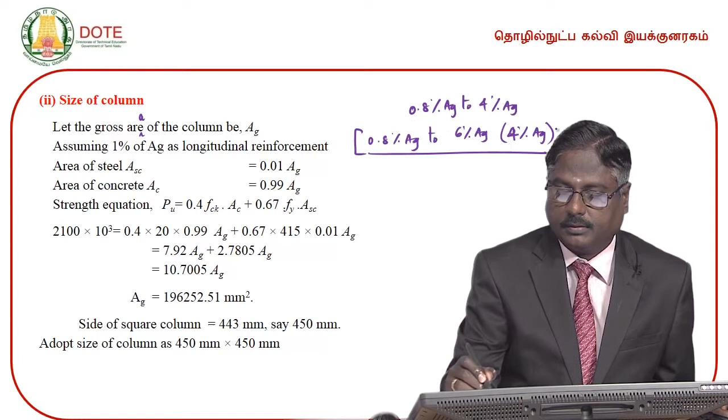Let the gross area of the column be AG, assuming 1% of AG as longitudinal reinforcement. The minimum is 0.8% of AG, the maximum is 6% of AG, and for all practical purposes it is restricted to 4% of AG. So we can assume any value between 0.8% AG to 4% AG, but in general it is assumed as 1% AG to 2% AG. This we have to bear in mind.

Again, 1% of AG is nothing but 1 divided by 100 of AG, so this is equal to 0.01 AG, very simple to remember.

So area of steel, assumed as 1% of Ag, therefore ASC is equal to 0.01 Ag. And area of concrete is equal to gross area of the column minus area of steel in compression, or the longitudinal bars, that is Ag minus ASC. ASC is assumed as 0.01 Ag, so 1 minus 0.01 will give you 0.99 Ag. So this is the value of AC.

Substituting all these values in this expression, 0.4 FCK AC plus 0.67 FY ASC, and PU of course arrived at, since this 1400 is a characteristic load, multiplied by the partial safety factor for load, the design load is found to be 2100 kilonewton, which we can rewrite as 2100 into 10 power 3 Newton.

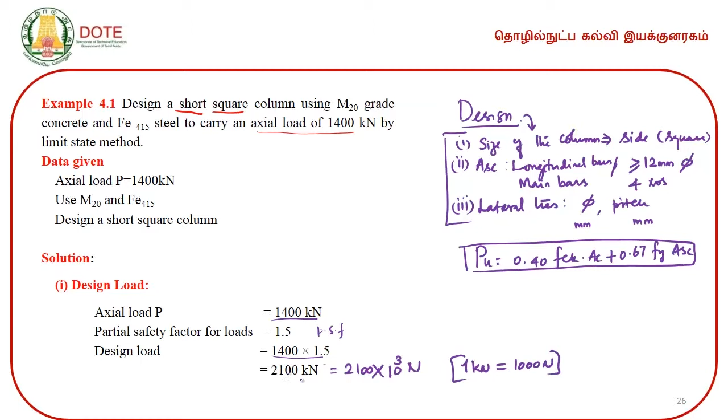Since 1 kilonewton equals 1000 Newton, converting kilonewton into Newton and substituting and solving, the gross area of the column is found to be 196,252.51 millimeter square, and this is the gross area of the column.

Now we must know the formula to find the area of each shape. For a square column, if the side is A, Ag equals A square. For a rectangular column, with breadth B and depth D, Ag equals B into D. For a circular column of diameter D, the area equals pi d square by 4. All three simple formulae one has to remember.

In this case it is a square column and the area is found to be this value, and for a square the formula is A square. To find the side you take the square root, so the square root of 196,252.51 is equal to 443 mm. This cannot be used as such because it has to be rounded off for practical application, so 443 millimeters is rounded to 450 millimeter.

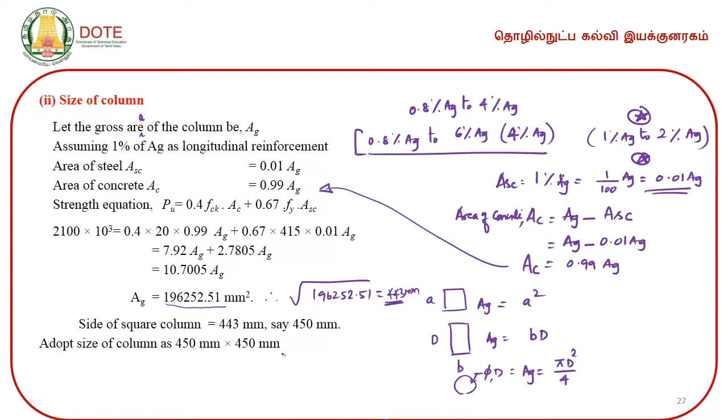Now the side of the column is arrived at. So the side of the column is 450 mm by 450 mm, and from the side of the column we have to find out the gross area of the column. We had initially assumed the area of steel as 1% of gross area.

So ASC is equal to 0.01 into Ag. Remember, after calculating the gross area and finding the side of the square column, you again find the gross area because you have rounded off. This is not 450 as per calculation, it was only 443 millimeters, which you rounded off to 450 mm, so now you have to calculate the actual gross area of the column using 450 by 450.

This is the percentage that you have assumed, so the area of steel in compression, or the area of longitudinal reinforcement, is found to be 2025 millimeter square. You can assume the diameter of the bar from 12 mm, which is the minimum diameter of the bar to be assumed, and we have to keep this in mind.

In this case, 20 mm diameter is assumed, and also 16 mm diameter bars are assumed. For economical reasons, we can have a combination of two diameters of bars. So here we have assumed 20 mm bars as well as 16 mm bars, providing 4 numbers of 20 mm bars and 4 numbers of 16 mm bars, and the actual area of steel is found to be 2060 millimeter square.

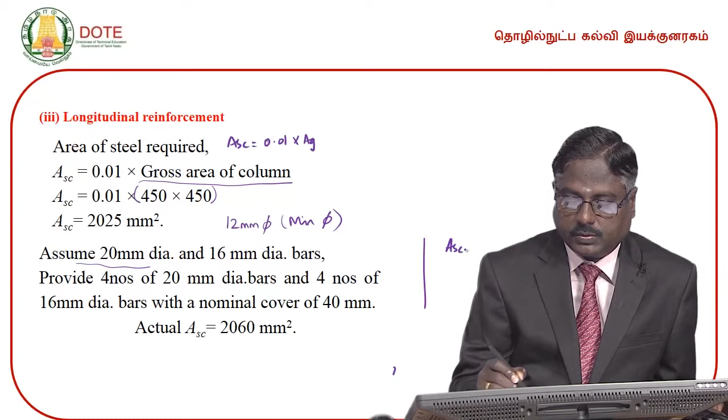That means we work out the actual ASC as 4 numbers of 20 mm bars, that is 20 square by 4, plus 4 numbers of 16 mm bars, that is 16 square by 4. This comes around 2060 millimeter square, but as per design it is 2025, which is less than that, so this is okay.

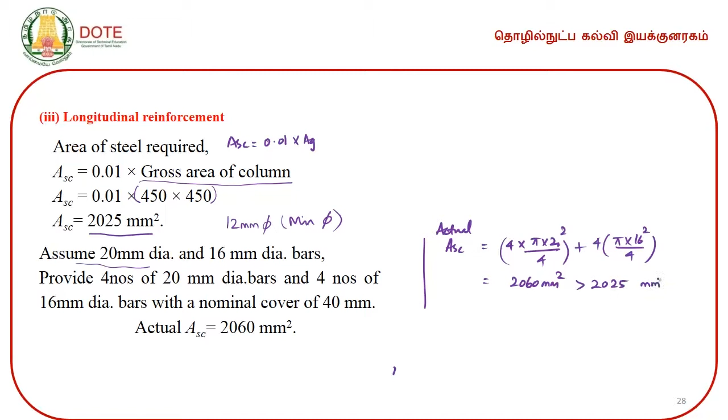And this is about the longitudinal bars. As far as lateral ties are concerned, we have to follow the provisions given in the code book. The minimum diameter of the lateral tie is the greater of two conditions: 1/4 of the largest longitudinal bar, here the largest longitudinal bar is 20 mm, so that comes as 5 millimeter, and the second condition is 6 millimeter. The greater of these two, 5 and 6, is 6 millimeter.

So we have to use the diameter of the lateral tie as 6 millimeter. The second one is the pitch of the lateral tie. For that we have three conditions: the least lateral dimension of the column, 16 times the smallest longitudinal bar, and 300 mm.

Here it is not 420 mm, it is mistakenly typed, it is 450. So the first condition is 450 mm, second condition is 256 mm, and third condition is 300 mm. We will take the least one, which is 256 mm. If you round that off, it becomes 250 mm.

So the result of the lateral tie is given in the form of diameter of the bar as well as the pitch we have to provide. Providing 6 mm diameter bar at 250 mm pitch is the answer for the lateral tie. So the answer for this problem is: the size of the column is found to be 450 millimeter by 450 millimeter, a square column, with longitudinal reinforcement of 4 numbers of 20 mm bars and 4 numbers of 16 mm bars. Lateral ties: 6 mm diameter bar at 250 mm pitch.

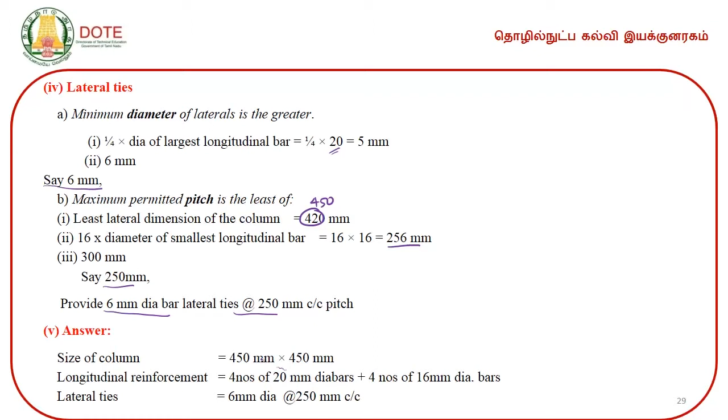Though our result ends at this point, for practical applications and to follow the codal provisions, we have to ensure this. So in this case, the answer is: size of the column is 450 by 450, main reinforcement is 4-20 plus 4-16 mm bars, lateral tie is 6 mm dia at 250 center to center or pitch, and again an additional tie tying the intermediate bars.

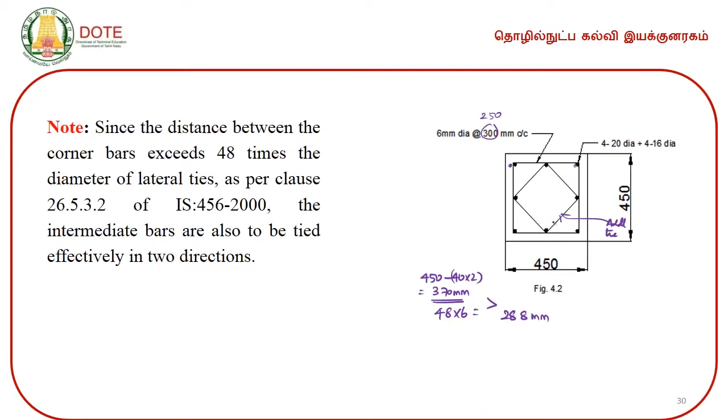And we will also see the second example. Again it is a design problem: design a short RC column, the only difference is here it is a rectangular column of size 300 mm by 450 mm, and the axial load given—again, it is not design load, so it is a characteristic load only. Axial load is 1000 kilonewton, grade of concrete given is M20, and steel is Fe415.

This you have to remember. Since the area of the column is directly given, one need not assume the area of steel in terms of gross area of the column. In the previous problem, area of steel was assumed as 1% of gross area, and the balance data worked out to find the size of column. But in this case, the size of column is given directly, so there is no need to assume. Remember this point.

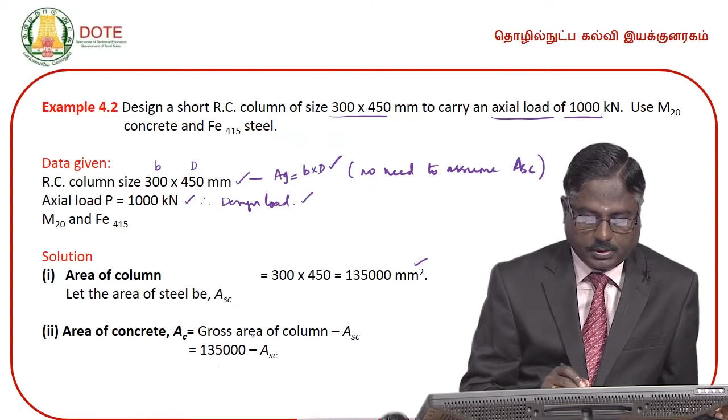So now area of concrete is equal to gross area of the column minus ASC. This is the area of concrete, and design axial load on the column is 1.5 times, this being the partial safety factor, giving the design load. Again the same old formula is to be used.

Design strength of the column is Pu equals 0.4 FCK Ac plus 0.67 Fy Asc. Substituting the relevant values, the area of steel in compression, or the area of longitudinal reinforcement, is found to be 1555.27 millimeter square. Now we have to find the number of bars.

Before that, you assume the diameter of the bar, which should always be greater than or equal to 12 mm.

So now assuming 16 mm bars, we can calculate the number of bars required using this expression: number of bars equals area of steel arrived divided by area of a single bar. In this case, it is 1555.27 divided by pi into 16 square by 4, since we have assumed 16 mm bars. This is the area of a single bar.

The number of bars probably is less than 8, around 7.5 something. If you round off, you get 8 numbers. This is how you work out the number of bars. So providing 8 numbers of bars of 16 mm dia, the actual area of steel provided is 1608 millimeter square, and this is as far as the main reinforcement is concerned.

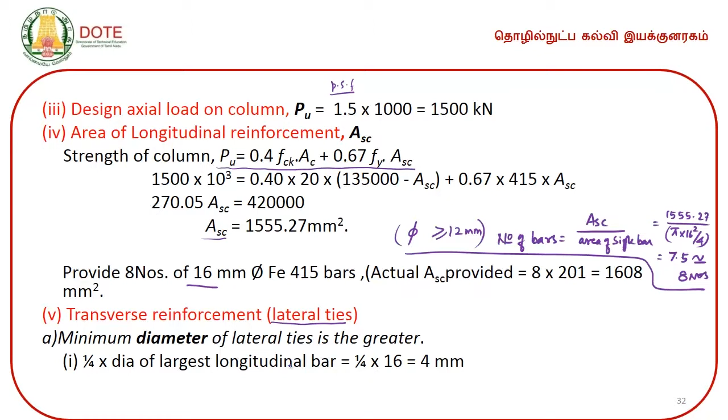The fifth step is to find the transverse reinforcement or the lateral ties, again following codal provisions. As far as the diameter of the lateral tie is concerned, there are two conditions: one is 1/4 of the dia of the largest longitudinal bar, that is 4 mm, and the second is 6 mm, the greater one being 6 mm. So provide 6 mm diameter as the lateral tie.

Maximum permitted pitch is the least of 3 conditions: one is the least lateral dimension, that is 300 mm; 16 times the smallest longitudinal bar, which comes around 256 mm; and the third condition is 300 mm. The lesser one is 256, approximated to 250 mm. So the answer is: provide 6 mm dia lateral ties at 250 mm center to center.

Now the answer part: size of the column is given in the problem, and the area of steel or longitudinal reinforcement is found to be 8 numbers of 16 mm dia bars, with lateral ties of 6 mm dia bars at 250 millimeter center to center, and this is the detailed drawing.

This is the breadth of the column, 300, and this is 450. 8 numbers of 16 mm dia bars are provided like this, and the lateral tie is 6 mm dia at 250 mm center to center.

Again, the intermediate bars are not connected here, but as per the codal provision this has to be connected. The intermediate bars are also to be connected by providing an additional tie. This one has to be remembered.

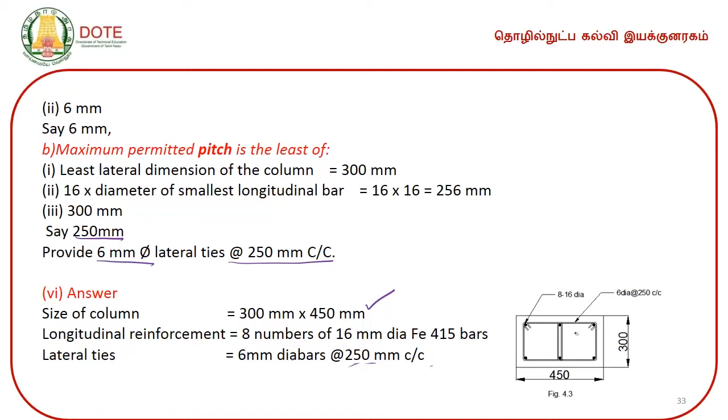The same procedure is to be followed: find out the distance between the corner bars. If that distance exceeds 48 times the diameter of the lateral tie, then we have to provide the lateral tie for the intermediate bars in both directions. Following that procedure, this additional tie is provided in the sketch.

We have seen in example 1 a square column, and in example 2 a rectangular column. In this example, we are going to design a circular column which has to carry an axial load of 1000 kilonewton with circular rings or lateral ties.

As you all know, a circular column will have two types of ties: the circular tie and the helical tie. In this exercise we are going to design a circular column subjected to axial load with a circular tie, with concrete grade M20 and steel Fe 415. The axial load is 1000 kilonewton, and the grade of concrete and steel are given.

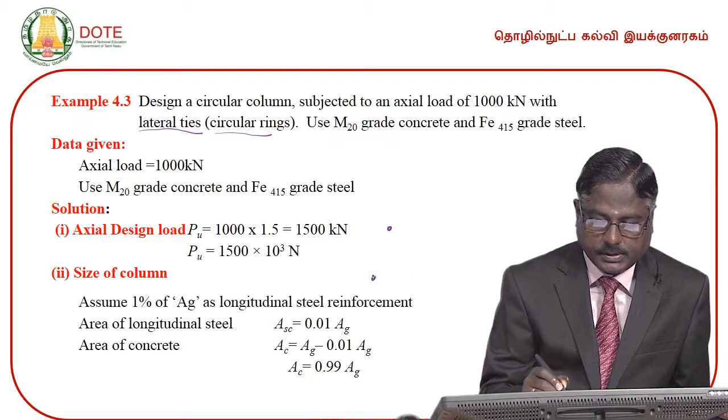Again, here the size of the column is not given. Therefore, since the size of the column is not given, assume the area of steel in compression. In general it ranges from 1% of Ag to 2% of Ag. So in this case it is assumed as 1% of Ag.

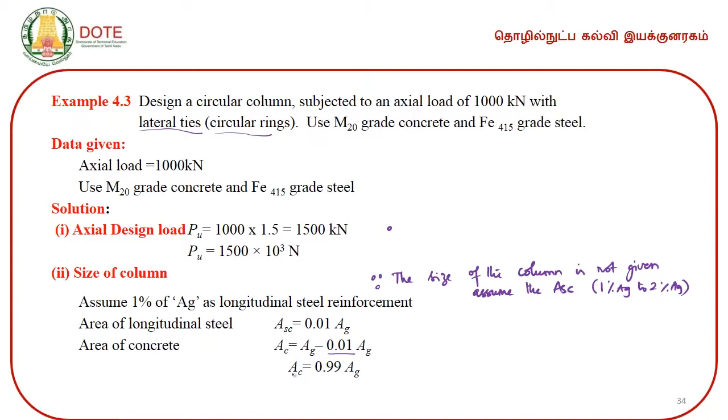So area of steel in compression is found to be 0.01 Ag, and area of concrete is found by deducting the area of steel from the gross area of the column. Substituting that in the formula, the gross area of the column is found to be 140180.36 millimeter square. Since this is a circular column, area for a circle is pi d square by 4.

Equating this to the gross area gives the diameter, and therefore d is equal to the square root of 140180.36 divided by pi into 4. So the diameter of the column required is 422.47 millimeter, which is to be rounded off to the nearest practicable value.

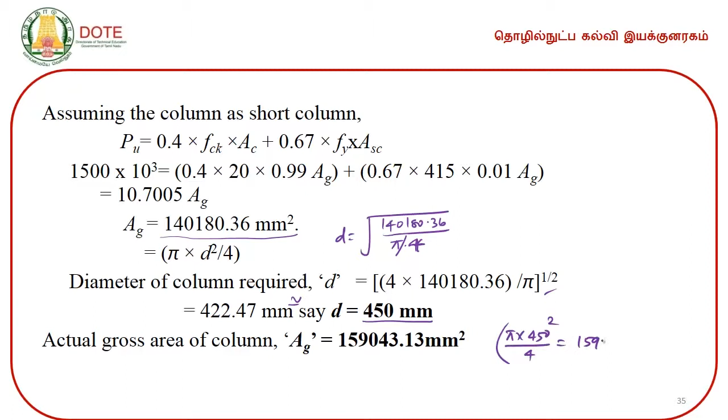So here it is rounded to 450 millimeter, and the actual gross area of the column, substituting pi into 450 square by 4, is equal to 159043.13 millimeter square. Now area of longitudinal reinforcement, it is 1% as initially assumed, substitute the value.

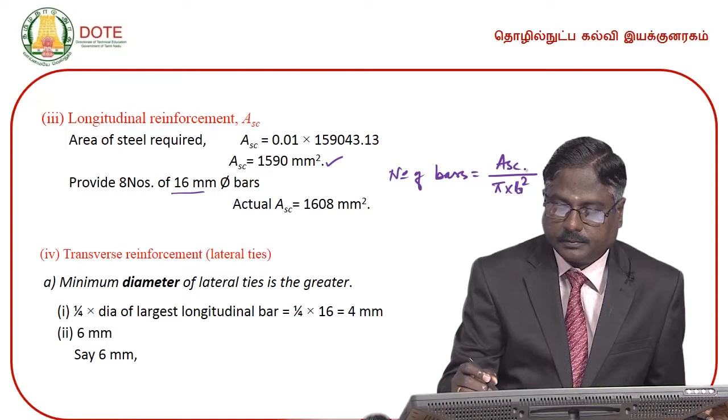Area of steel in compression, or area of longitudinal reinforcement, is found to be 1590 millimeter square. Assuming 16 mm bars, number of bars is equal to Asc divided by pi into 16 square by 4. This is equal to probably 7 point something, which is to be rounded off to 8 numbers, 7.5 something rounded off to 8.

So that is how the area of steel in longitudinal reinforcement, in terms of diameter of bar and number of bars, is worked out, and the actual area is given here.

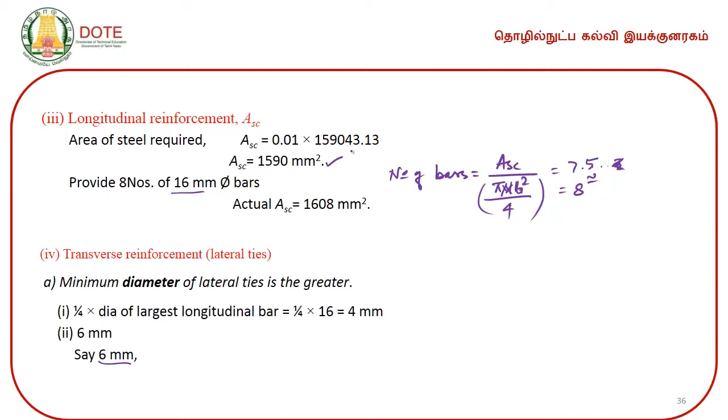And transverse reinforcement, as far as the lateral ties is concerned, again two conditions: the first is 4 millimeter and the second is 6 millimeter, the greater one is 6 mm. For pitch, least lateral dimension is found to be the diameter, since it is a circular column, the diameter is found to be 450 mm. So only one dimension.

So 16 times the smallest longitudinal bar gives 256, and 300. So the smallest value is 256, rounding off you will get 250 mm. So provide 6 mm diameter lateral circular bars at a pitch of 250 mm center to center.

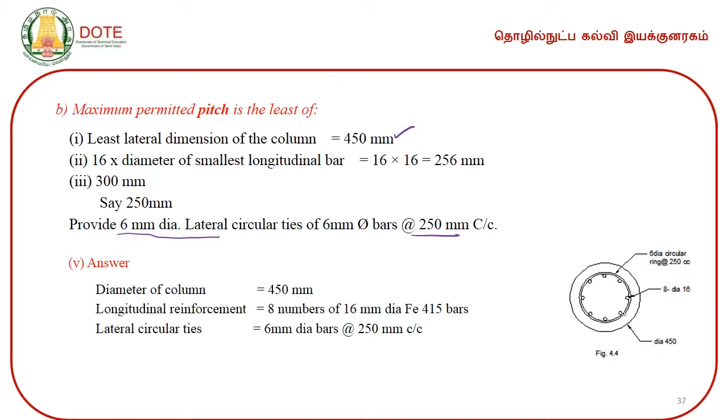This is a detailed drawing showing the answer: diameter of the column, the number of bars, the diameter of the longitudinal bar, and the lateral tie. This circular column with helical reinforcement is very important to note.

Helical reinforcement: if you are given a problem with helical reinforcement, the point to keep in mind is a 5% increase in strength. That means the formula is multiplied by 1.05. You have to remember this, helical reinforcement, this is very important.

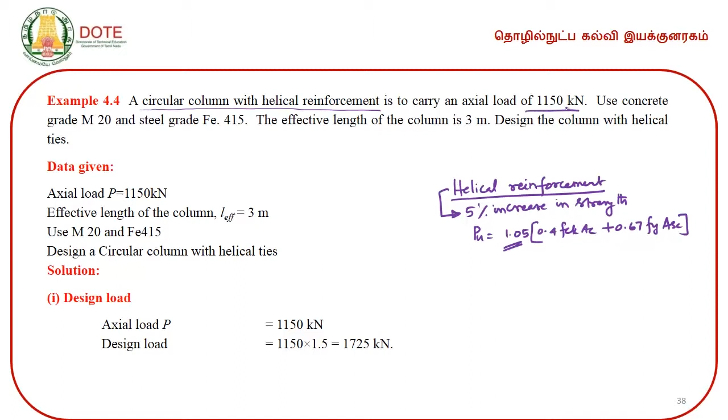Now, when helical reinforcement is given along with the axial load, grade of concrete, grade of steel, and effective length of the column, that means you have to check one more parameter, namely the slenderness ratio. If the length is given, then you have to find out the other parameter, that is the slenderness ratio, as well as the eccentricity value. That is the clue.

For the previous three problems, we have not checked the slenderness ratio or the minimum eccentricity value. For this problem, since you are given the effective length of the column, we have to check the slenderness ratio to determine whether it is a short column or a long column, and also check the eccentricity for the column.

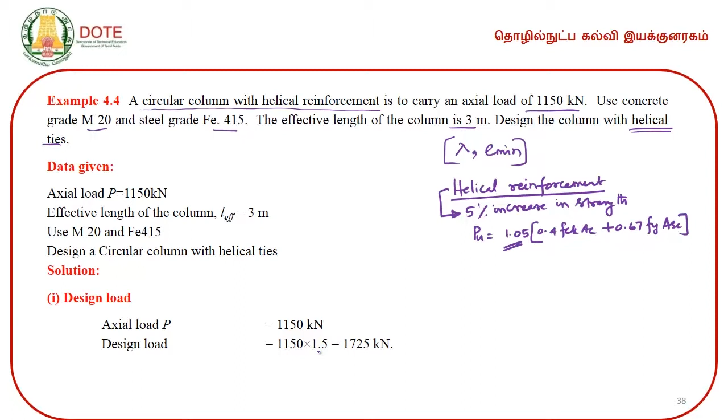And remember this helical ties. Now design load, which is characteristic load multiplied by partial safety factor, will give you the design load, and for this the design load is 1725 kilonewton.

Since the size of the column is not given, assume the percentage of area of steel in terms of percentage of gross area of column. So here it is assumed as 1% of Ag. So Asc is this, and area of concrete is found by deducting area of steel from gross area.

Substituting the relevant values, Ag is found to be this, and since it is a circular column, diameter is the dimension. So diameter is found to be 453, rounded off to 470 mm.

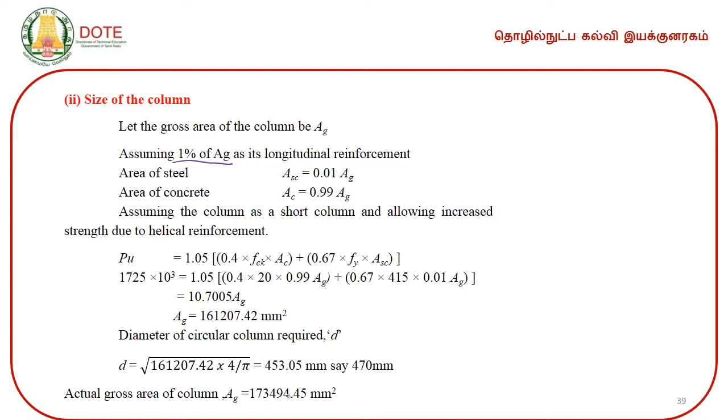Now the actual area of the column is found to be 173494.45 millimeter square, and we have to check this column for the slenderness limits or slenderness ratio. So effective length is given as 3 meter, that is equal to 3000 millimeters, and diameter of the column is 470.

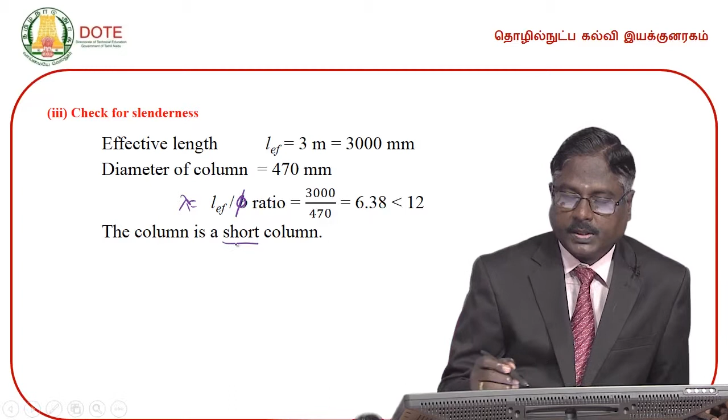Slenderness ratio lambda is equal to L effective by D. Here it is not D or B, it is only diameter, and that gives you 6.38. Since this value is less than 12, the column is to be designed as a short column. This is very important: suppose if it exceeds 12, then it is to be designed as a long column.

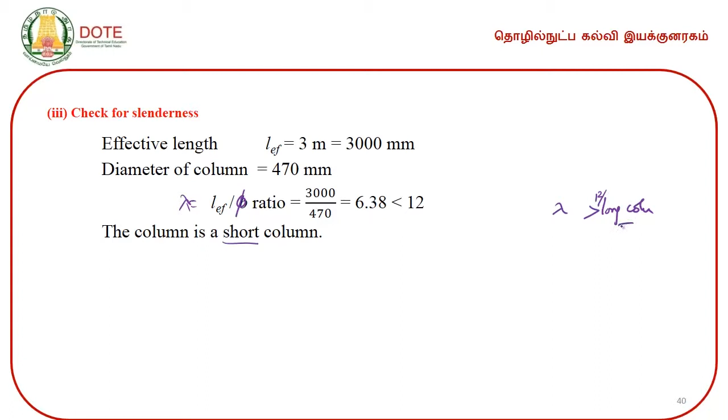And again you have to check for the minimum eccentricity. As per the codal provision, the minimum eccentricity value is L by 500 plus D by 30, and here it comes around 21.67 millimeters. This is the actual eccentricity. The minimum given by the code is 20 mm. The maximum permitted eccentricity on a short column is 0.05 D, that is 23.5 mm.

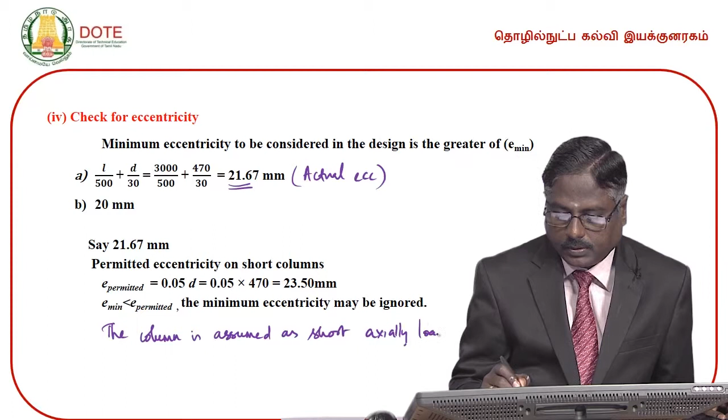Since the actual eccentricity, even though it exceeds the minimum eccentricity, is found to be less than the maximum permitted eccentricity, the minimum eccentricity may be ignored. The column is assumed to be taken as a short axially loaded column. This is very important, axially loaded column, and accordingly, of course, we have checked the slenderness ratio as well as the eccentricity limits.

Now the reinforcement details. Longitudinal reinforcement is assumed initially as 1% of gross area, that comes around 1734. So, providing 16 mm bars, 9 numbers, the actual area of steel is found to be 1809 millimeter square.

And again, transverse reinforcement - remember this is helical tie - we have to follow the same codal provision as far as the diameter is concerned. Since it is not given here, I have assumed the diameter of the bars as 8 mm. But students, what you have to do is write the provisions given in the code for the diameter of the lateral tie.

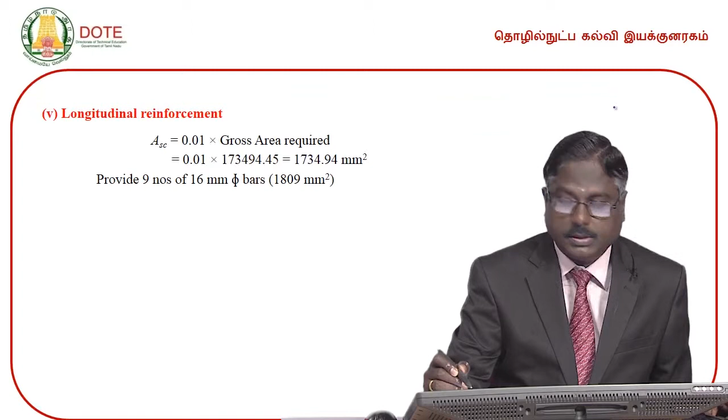The first condition for the diameter of lateral tie is the greater of 1/4 of the largest longitudinal bar, and the second condition is 6 mm. For this case it works out to be 1/4 of the largest longitudinal bar, 16, so this is only 4 mm, and the other is 6 mm. So the greater is 6 mm. Even though as per the codal provision the diameter of the lateral tie is 6 mm, here it is assumed as 8 mm, and accordingly the other parameters are worked out.

The maximum permitted pitch is the lesser of 75 mm or 1/6 of the core diameter, and all these are given in the code. Here the core diameter is 406 millimeter, so 1/6 is 67.67. The lesser value among 75 mm and 67 is 67. So keep that value. The minimum permitted pitch is the greater of 25 mm and 3 times the helical reinforcement diameter, which is 24 mm - the greater is 25 mm again.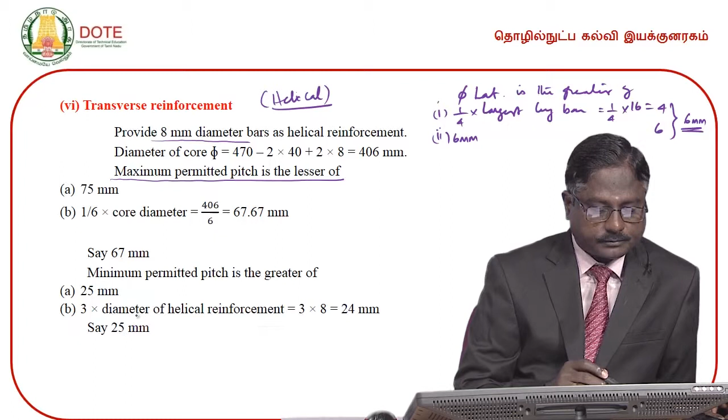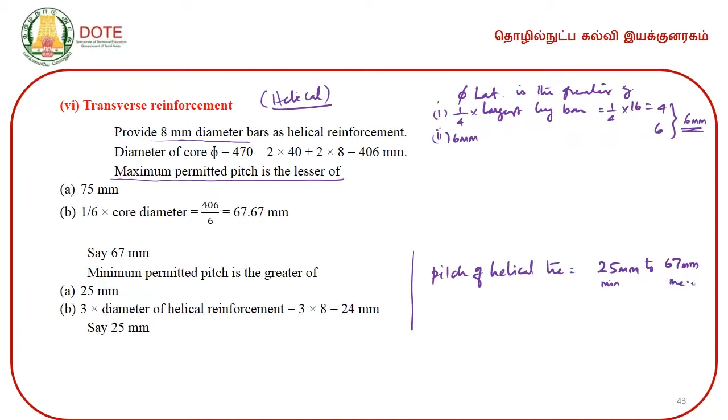So the pitch of the helical tie is to be provided between 25 mm and 67 mm. So 25 mm is the minimum and 67 mm is the maximum. The remaining portion, that is a check for the helical tie reinforcement pitch, we will see in the next lecture. Thank you for watching this video.